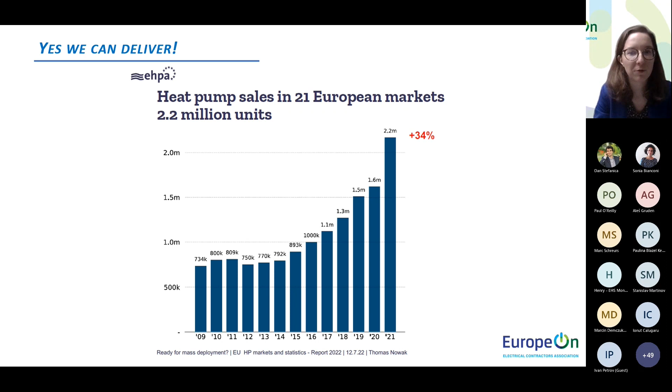One very last slide for me, please. It's about my expectations for today, because of course I know I remained quite policy oriented and a bit high level, without any presumptuous comments from myself. So I'm really eager to listen to the other presenters on the different projects that they are developing, which will be way more concrete. I just had a few expectations for today, so just maybe to start a bit, to engage with the next panelists.

First, the need to think upstream. As I said, it's not just about training better the existing workforce. We need to broaden the pool of workers. Upskilling has some internal barriers, for example the lack of time of people to upskill, maybe the lack of financial means. So how do we deal with that?

Reskilling, that I mentioned already. Of course, we cannot overlook the complementary or so-called secondary skills, such as soft skills, system integration, how do you work between different trades, cross-skilling. I also think that interoperability is key, so that the trainings that are provided are agnostic. It's no use being trained in only using one type of heat pump. We really need to have savvy installers.

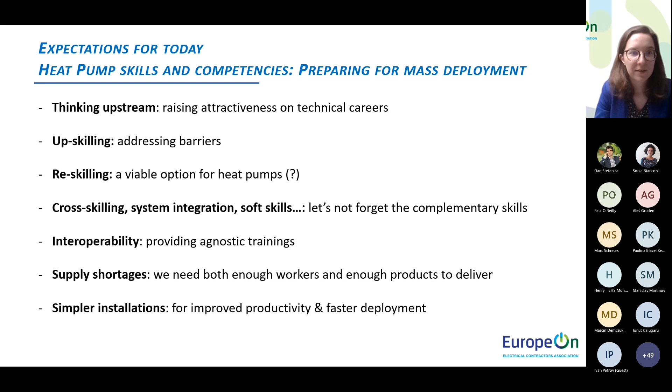Real food for thought there, I think, and a great way to start off this webinar. So with that, I'm going to move to the next slide and introduce our next speaker, Stephen Murphy, lecturer and researcher at the Technological University of the Shannon. He mainly lectures in community energy and renewable energy, and his research topics range from heat pumps, retrofit and renewable energy to waste management and circular economy.

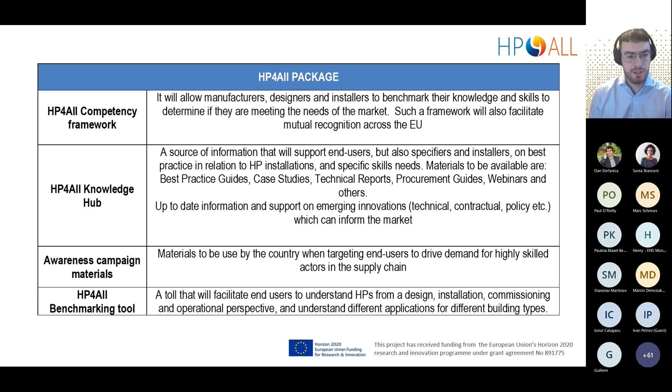So just a quick overview of what we're looking at for the HP for All project. I can happily say we've reached our targets. The impacts are based on training of installers, designers, specifiers, procurement officers, policymakers, and end users too.

We have primary energy savings from this project of 2 GWh per year, based on a calculation I won't get into now, plus renewable production of 1.95 GWh per year, and a reduction of 628 tons of carbon per year.

We've over 400 people trained—the latest figure is over 500, I think, maybe more, but around that. So yes, 400 people trained in 3 pilot regions. Each region has its own approach, because each has different stakeholders, a different market maturity, and in our case, 3 separate languages as well.

So you had to create the resources and materials based on your stakeholders and your market as well. This is coming into our replication plan. We're going to take this information that each market is different. One shoe doesn't fit all. Work has to be done to find what shoe to put on.

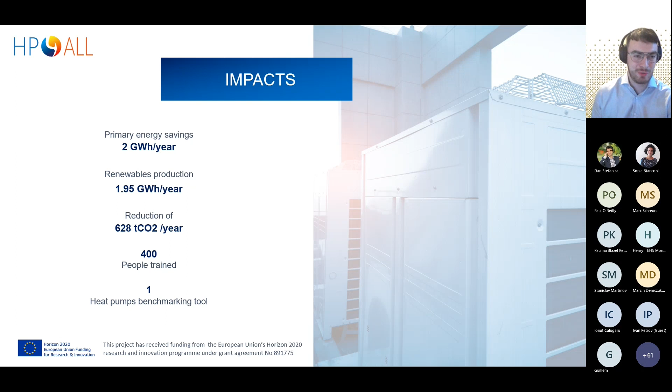Just an overview of the partners. We have EHPA, thank you for today. CTA, based in Andalusia. TUS, that's ourselves. IERC, based in Cork in Ireland. RINA, based in Italy. ESV, or Energy Spar, from Austria, and Sustainable Innovations from Spain.

So again, we've worked 30 months with each other, and I think we make a good team, and a very open team, a very hard-working team as well. So it's been a pleasure for the last 30 months, and here's hoping that we'll find more funding for this project going forward.

So today, to talk a bit more about heat pump skills and competencies. So just a bit of background first.

Another main output of this project, aside from the heat pump skills and competency framework, is the notion of mutual recognition of skills across Europe. This is, I would say, a touchy subject, and also a difficult subject to pinpoint. So we'll go through a bit of background first, and then we'll discuss how the HP for All project aims at addressing this.

Each EU member state sets out its own national system of education and training, for every single EU member state. This leads to its own professional qualifications, whether apprenticeships, guilds in some member states, or courses people can do. The EU has systems for recognizing these skills that enable professionals to make full use of their training so they can work in another country. Basically, a professional qualified person from one country is qualified to work in another country.

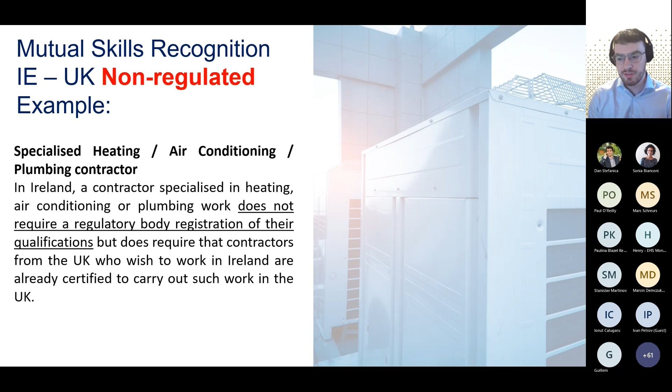For example, take this non-regulated tradesperson, a specialized heating, air conditioning, and plumbing contractor. In Ireland, if you're a specialized contractor in heating, air conditioning, or plumbing, you don't require your qualifications to be checked by a regulatory body, but you do require certification already in the United Kingdom. So if you're certified in England, you can kind of work in Ireland, but it's not really written anywhere. It's kind of just an industry tick, saying yeah, if you have it over there, that's fine.

Then you have a regulated body, like an air conditioning professional. I gave the example of the electrical contractor; now we're looking at an air conditioning professional. A qualified contractor based in another EU country or the UK is required to provide proof of qualifications in refrigeration, an apprenticeship in refrigeration, mainly a National Craft Certificate level around 6 in Ireland, around level 5 in the European framework. The contractor must also be F-gas compliant, and all this documentation has to be checked by a regulatory body for this person to work in Ireland. That's the main difference between the two.

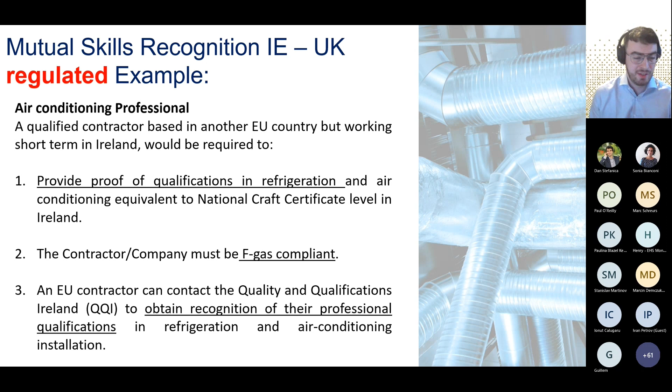So there are some trades with this unspoken law, that if you have one qualification you have the other. But with regulated trades, there's more nuance, or I wouldn't say nuance, more issues if it's not done correctly. For example, air conditioning with refrigerants: if refrigerants leak, that's a big problem especially for emissions. That's why it's regulated, to make sure it's a competent person doing the work and to reduce the likelihood of leaks.

So how does HP for All want to get into this minefield that is mutual recognition of skills? We can't directly force competency bodies, third level education, or apprenticeships to sign a waiver saying anyone who works in Ireland in heat pumps can work in Austria, for example. It's too complicated for that, there are too many actors involved. This is more of a start on the road to mutual recognition.

That's what I would say. So the agreement is signed by the HP for All project representative and another regional actor, you could say. The document is intended to commence a dialogue with the objective of mutual recognition of skills, so heat pump skills gained in one region can be recognized in another. I've put in there that it's not legally binding in any way. It's just a start on this road to mutual recognition. So again, there can be various ways to do it.

It doesn't have to be that your apprenticeship people talk to our apprenticeship people and come together and say the syllabus is pretty similar, we can sign off on that. It can also be things like an EU-wide academy. We'll have all options open, that's what I would say. There's no point focusing on one way of doing it. There has to be multiple ways of doing this.

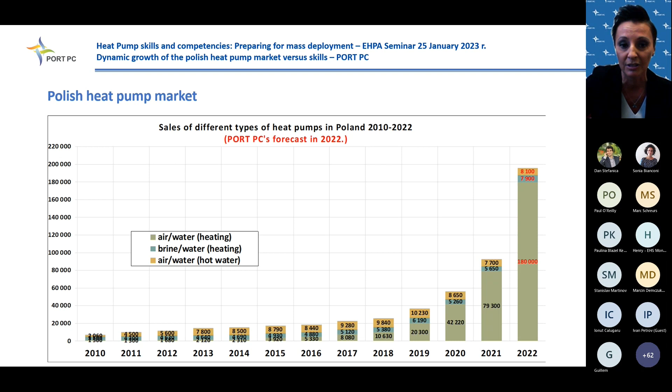This was the forecast, but if we look at last year's sales of heat pumps in Poland, we can see it was more than 90,000 units. And looking at the increase, it was also quite a big increase, more than 70% increase of the market.

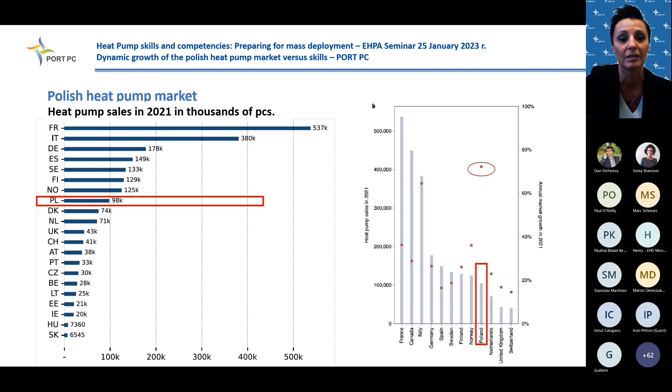So we can see that our country, right now after 2022, could be really high if we speak about statistics of heat pump sales in Europe.

This slide shows the increase of heat pump sales in countries in Europe after the first half of 2022. You can see how it looks in different countries, and of course Poland is here. It was estimated that sales increased about 136%.

But after the fourth quarter of 2022, we can observe that heat pump sales slowed down a bit. We estimate that sales increased not as much as after the first half of the year, but it will still be a quite big growth, because 122% is a big growth, hyper growth of the heat pump market. I think Poland could be number one if we speak about such a big increase.

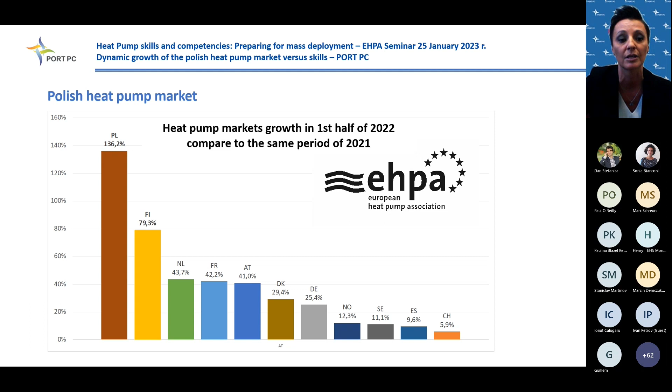Why did that happen in 2022? There are some main drivers of the hyper growth in Poland, but first I will choose the impact of the subsidies, the finance support in Poland right now, because as you can see, we have a few programs that are really attractive for the end user, for investors, especially if we speak about the residential market.

We have 3 main subsidy programs. The first one is retrofit tax relief. It is not a subsidy or grant, but it is a deduction of expenses for retrofitting investments from the amount of income tax calculating base. According to that, people can save some money for retrofit activities in their houses.

The main program that we have right now is Clean Air. Clean Air subsidy is for renovation, so you can exchange the old boiler for a new one that fulfills the eco-design requirements. But mainly people choose heat pumps, especially last year, and I will show you at the next slide how it looks in terms of the share of heat pumps in the subsidy applications.

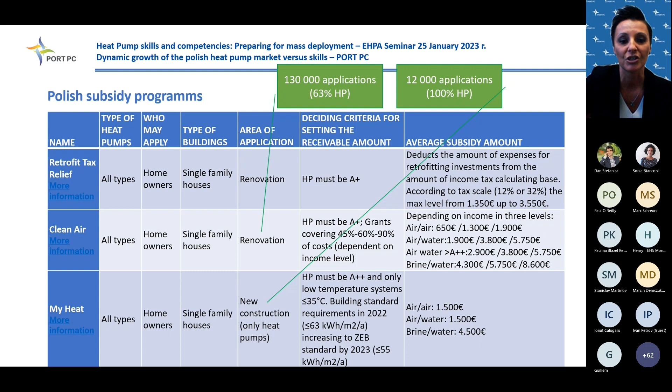So they have to meet the requirement of less than 55 kilowatt hours per square meter per year for their buildings. So we will just help to make the new buildings as energy saving as possible.

And if we speak about this statistics, here you have the graph that shows the share of heat pumps in applications for subsidy in the Clean Air Subsidy program, for the retrofit houses, for renovation.

You can see that something happened, as everybody knows what happened in February, and since February there is a big change in the share of heat pumps in applications. At the beginning, heat pumps had nearly 25%, 28% of the share in the applications for subsidy, and then it goes up to 60% right now. In the second half of the year, every month we've reached more than 60% share of heat pumps in the applications for subsidy.

If you look at the yellow line, this is for gas boilers. At the beginning, gas boilers were the main source chosen in this Clean Air program for renovation of houses, at 40% of the share in applications, and then it goes down to 20%, and it was kept there during the second half of the year.

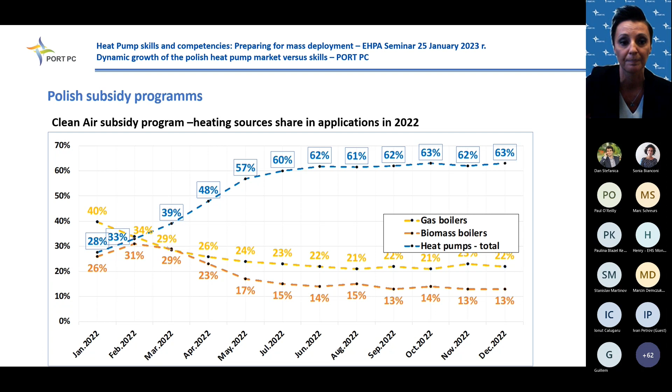To look at the situation in Poland, there is a graph that shows that in Poland in 2018, the main heating source was the coal boiler, then gas boiler, and also pellet boilers, and then at the top of the pyramid, with a small amount of units installed, it was heat pumps.

Then the situation changed in 2020. We can see that coal boilers decreased, gas boilers stayed at a high level, and pellet boilers also made quite a big increase. And of course heat pumps started to increase, and we can speak about this big boom for heat pumps in Poland since 2020.

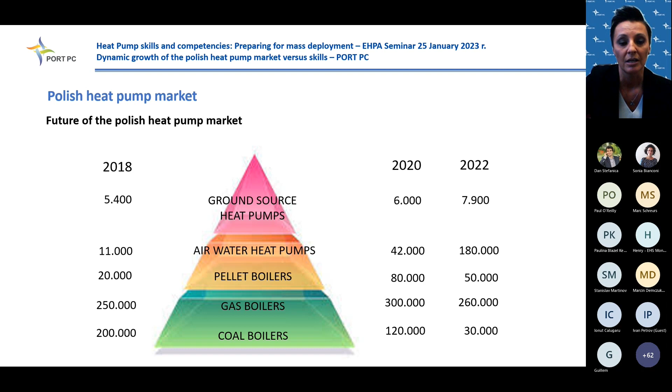And then in 2022, you can observe a quite big decrease in fossil fuel boiler installations, and also a little bit of decrease in pellet boilers. But you can see that heat pumps were pushed to the top level of the pyramid. So this is the situation right now, and I hope it will be stable for the next 10 years.

Yeah, this was the statistics for our market. And now I want to tell you about some good practices that we will have in Poland.

First of all, I want to tell you about the project of industry skills centers. It is a new project, implemented in September 2022 as a competition for institutes to establish such skills centers.

Right now, this competition is ending, and we will know how many and who will manage these skills centers. Also, as PORT PC, the Polish organization of heat pump technology development, we will also apply for financing of such a training center.

The plan for this year is at least 20 such training centers to be created by the end of 2023, and another 100 centers by the end of 2024. In this project, 120 fields were defined, and one center will be established in each region.

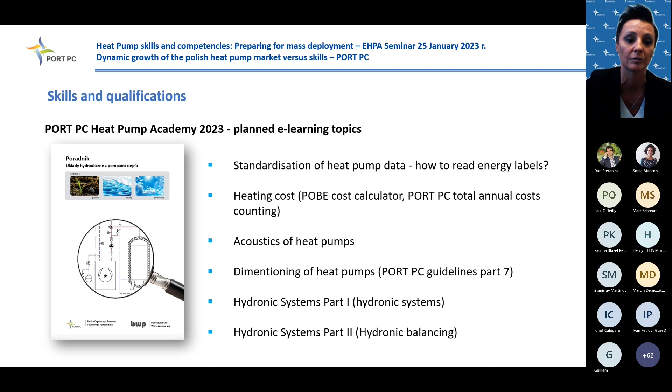Yeah, and if we speak about this standardization of data provided by the heat pump manufacturers, it's really important topic in Poland right now, because last year there are many new brands that appeared in Poland, and in some cases it's quite hard to find energy labels, to find product fiches for the heat pumps. So it's really important to push everybody to use the same data.

So for sure we will promote heat pump keymark and EHPA quality schemes in Poland. And we will push everybody to use product label and energy labels, and everybody should have access to the PDF files with these parameters.

So, for example, energy class, ETA-S, SCOP in the cold and average climate zones, sound power level and heating power, and things like that. All these parameters should be taken from the product label and energy label to speak the same voice and with the same standards.

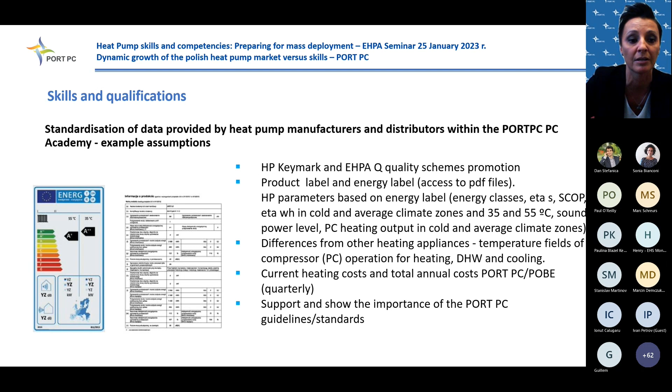So this was my presentation. This is the last slide.

So thank you very much one more time for the invitation, and I was happy that I could show you how it was in Poland, because right now everybody is asking what is going on, why there is quite a big boom in Poland in heat pumps, and everybody is wondering if next year we will have the same big increase in our market. So thank you very much.

Thank you so much, Gosia. Very interesting indeed to have that insight into what's happening in Poland and to get some context on that. So thank you.

So now we pass over to Rolf Iver Mytting Hagemann, who's the Secretary General of the Norwegian Heat Pump Association, where he's been since 2014. There he's responsible for policy, framework conditions, consumer information and training of installers, contractors and consultants. He's active in several of EHPA's committees and is Norway's delegate in the IEA Technology Collaboration Programme on heat pumping technologies. Thank you very much, Sarah.

I will use approximately 50 slides. Most of them are just pictures, so I will be ready within 20 minutes. So in short, I will just start with some background.

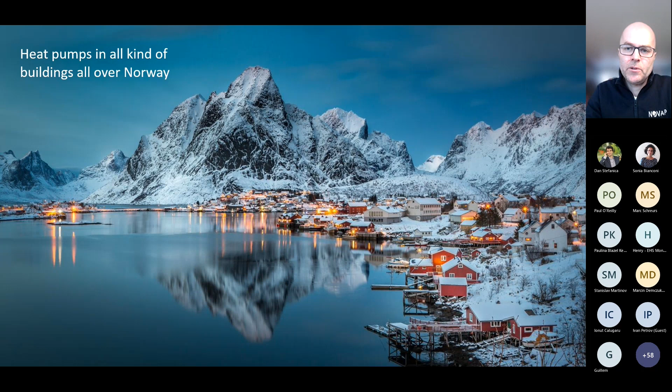So I'm going to say a little bit about some success factors for heat pumps in Norway. There are lots of different drivers for using heat pumps in Norway, prices and ban of fossil fuels, etc. But we have, together with the other Nordic countries, been quite demanding towards the manufacturers from both Europe and Asia, so we have high quality heat pumps for cold climate dominating our market.

Many of these heat pumps are more expensive than what you find in other European countries because they have to work at really cold conditions. We have a large network of skilled installers throughout the country, especially when it comes to air-to-air, and I will show you the statistics in a few minutes.

The challenges we have are especially the air-to-water and brine-to-water heat pumps. They are costly, as in the rest of Europe, and many end consumers, both in private households and commercial buildings, regard them as expensive, even if they are profitable. They are regarded as expensive because they look at the investment cost and not necessarily the cost of paying for energy.

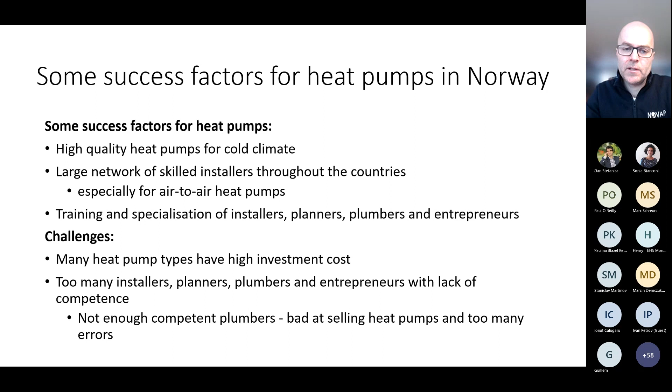Of course, most heat pumps in Norway work well. If not, we wouldn't have the numbers we have. But still, there are too many complaints and too many installations with errors, and we can't have that in the future. A little explanation about the heating system in Norway.

I'm not going to go into detail, but what you see in green is use of electricity. In industrial processes, of course, we still have a lot of fossil oil, coal, and gas for some industrial processes and heating, but electricity is common in many industrial processes, and heat pumps are getting more and more common in several of them. When it comes to heating in all kinds of buildings, electricity is the main heating source, together with electric heat pumps.

And you will see the same in Sweden and Finland too. Of course, there you will see more district heating than in Norway. We also have district heating, but not as much as in those countries and in Denmark. But we differ a lot from the rest of Europe since we have a much larger share of renewable energy, or renewable electricity. Like 98% of our electricity is renewable. So electric heating is much more common in Norway compared to the rest of Europe, where gas or district heating from fossil sources are dominating for the moment.

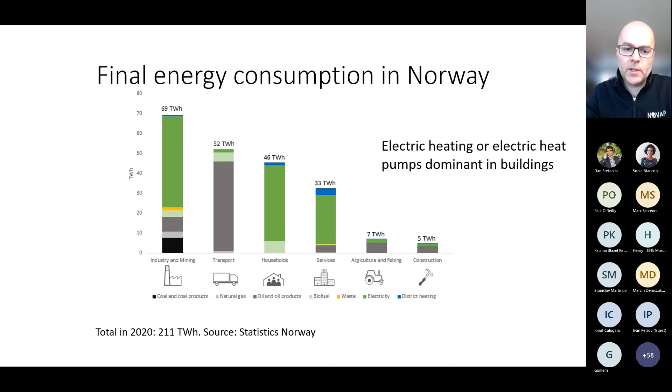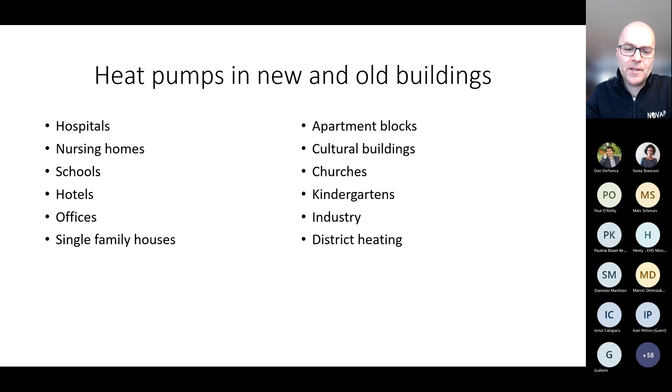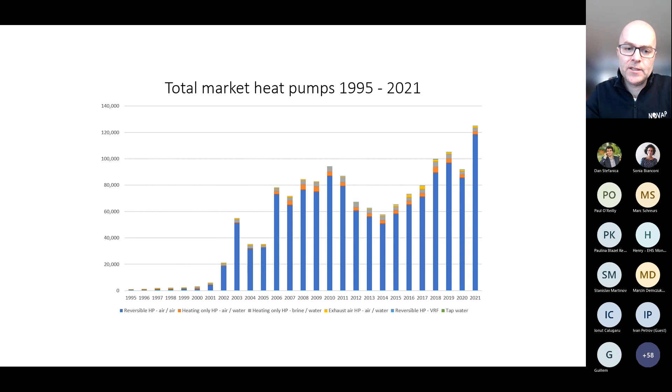So here you see the figures on the amount of heat pumps sold until 2021. You see that air-to-air heat pumps are dominating. Of course, we also have air-to-water and brine-to-water, but the share is much smaller than, for instance, in Sweden and Finland. They also have a lot of air-to-air heat pumps, but they have much more air-to-water and brine-to-water heat pumps as well.

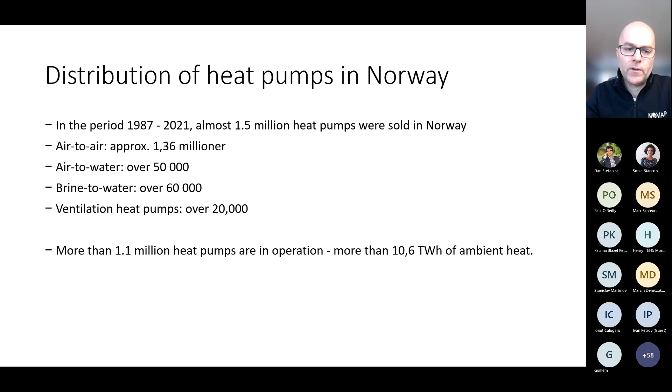So just to show some pictures of air-to-air heat pumps, for many of our European colleagues, it seems strange that we have so much air-to-air heat pumps in a cold country as Norway, but the air-to-air heat pumps that dominate in Norway are high-quality heat pumps that work down to -25, and the COP is quite good, actually down to -15 or -20.

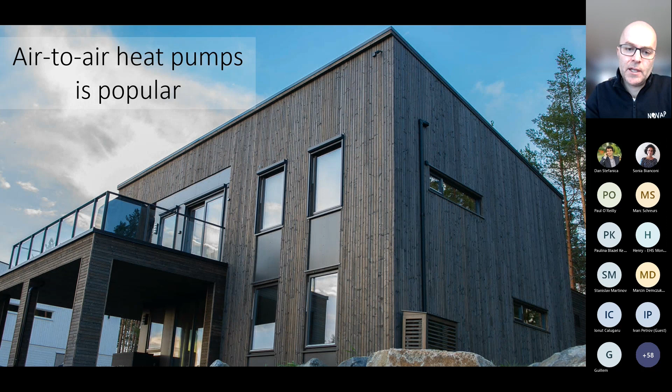But of course, in an old, not well-insulated house, air-to-air heat pumps cannot be the only heating source. So very often, air-to-air heat pump is an important heating source, but we have direct electric heating or use of wood stoves as additional heating. But in small energy efficient houses, quite often an air-to-air heat pump is the main heating source throughout the whole year, and it's only at the coldest days that you need additional heating. But that depends on the size of the house and how well insulated it is.

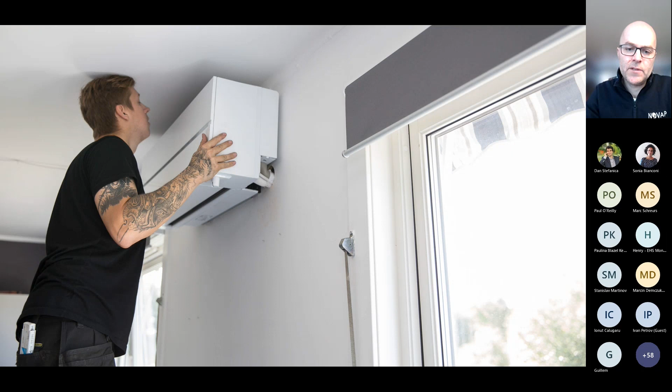So here you see a common air-to-air heat pump. More and more people use them also for cooling during summer, but it's mainly bought as a heating device. In many other European countries, they are mainly used as air conditioners, but in Norway, the driving market is for heating. So you have wall hanging units, and you have floor mounted heat pumps.

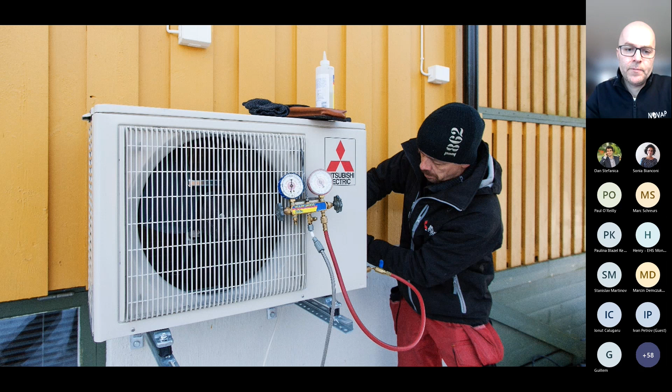This is a common outdoor unit. More and more mountain cabins have them. So of course they have to work where there's lots of snow and where it's cold.

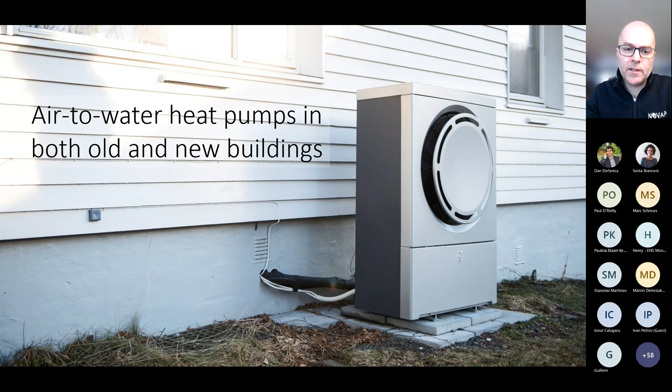And of course we also have air-to-water heat pumps in both new and old buildings. Ground source heat pumps are normally more robust in old buildings with high temperature heating systems. We have drillers all over Norway for all kinds of buildings.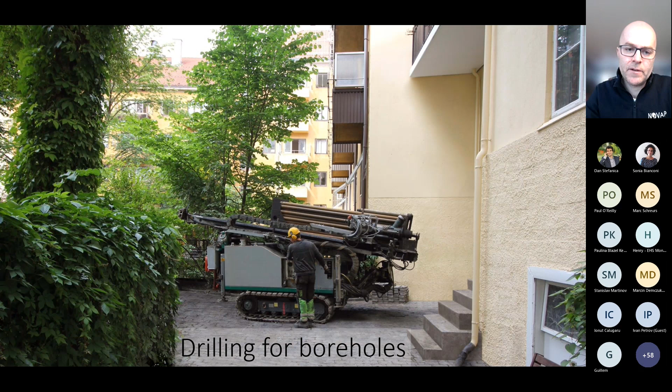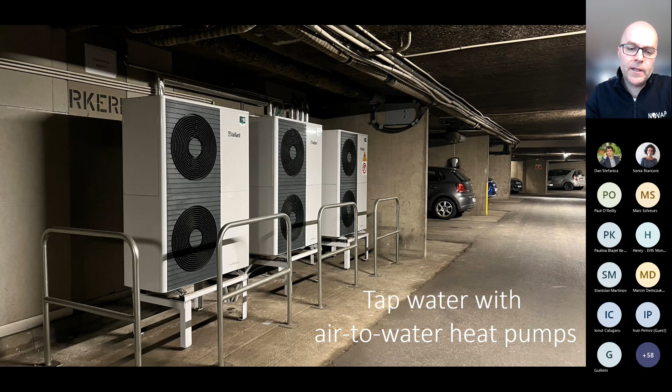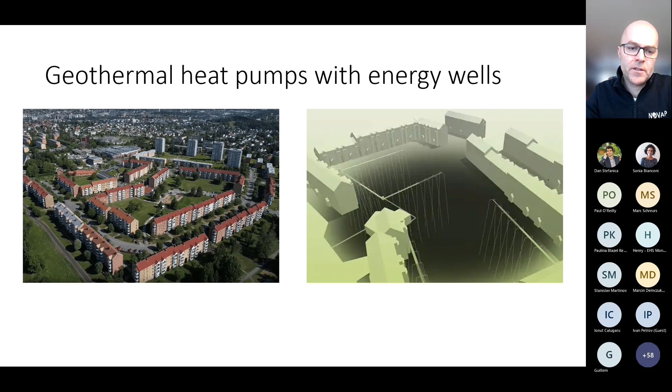And this is one of the largest multi-family house areas in Norway where they have one common energy well for all the buildings, but we have lots of energy wells all over Norway. And this is an ammonia heat pump from a new energy efficient big building.

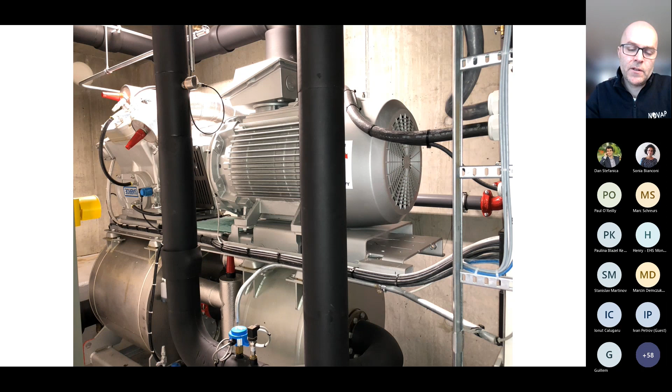So the reason why I show all these buildings is to show you that the heat pump market is quite diverse. So you have some installers that only work with small air-to-air heat pumps, and others that are skilled and work with more complex heat pumps, and some are also specialized only in natural refrigerants. And also you have the large industrial heat pumps and large heat pumps that we have in district heating.

So who is doing what? Because quite often we talk only about the installers, but you have engineers that design the heating systems in larger buildings, and you have heat pump engineers that are specialized on the heat pump itself, but they might not be specialized on how to design a good hydronic or heating system. You have lots of engineers and plumbers that are designing heating systems that don't necessarily know the conditions that are needed for a good heat pump system.

You have lots, unfortunately, too many plumbers that don't have sufficient training in heating systems and heat pumps, even if they are doing installations. Quite often they just get support over the phone from some of the importers, but too many of them don't have the necessary skills to do good installations. And you have refrigeration and heat pump technicians that normally specialize on larger heat pumps, refrigeration systems, freezers, and many of them don't work with heat pumps for households.

So the market for air-to-air heat pumps is dominated by installers that are electricians or that have other kinds of backgrounds who have been to our or other members' courses to learn how to install heat pumps. So those that are specialized in heat pumps, that are educated in heat pumps, they normally work with larger systems. Of course, some of them also install smaller heat pumps, but the market for smaller heat pumps is normally dominated by either plumbers or electricians and others that have just done training courses. They are not necessarily educated.

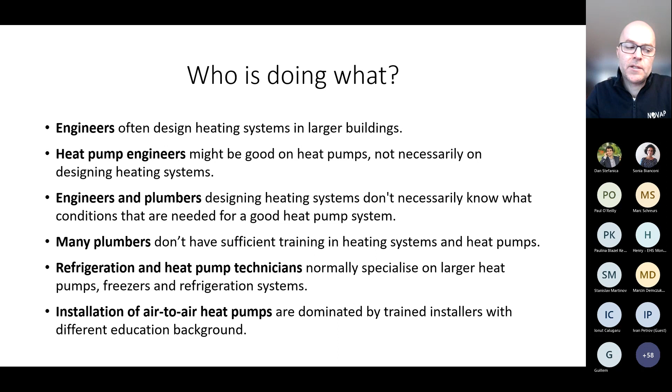So what do we have in public education in Norway? We have a vocational education system where you have the first 2 years - we have different kinds of vocational education for electricians and plumbers and different kinds of professions, but this is for the refrigeration, cold and heat pump technicians. So the first 2 years is a common education for working with refrigeration, heat pumps, and ventilation, and then they get more specialized in the 3rd and 4th years.

Then they become a trainee out in a company. It's also possible to have fewer years, only 1 year at school, and then do the rest of the education at a company with guidance. It's also actually possible to do all the education at the company, but this is the most normal way to educate themselves. And what they do is specialize in heat pump and refrigeration technology.

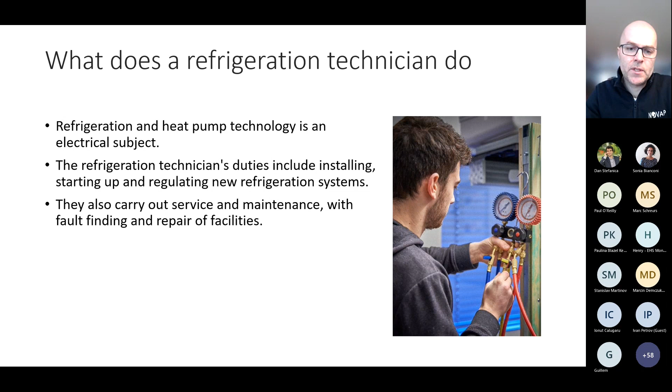So they are trained in installing, starting up, regulating and doing maintenance on these heat pumps and refrigeration systems. And also we have the plumbers, who have the same education system but a half a year longer apprenticeship. So they either have a 2-year education, 1-year education, or a 4.5 year traineeship.

But what is a challenge is that the education system for plumbers for the moment is not good enough for heat pumps and hydronic systems. So they are depending on doing courses and being trained after the education.

Also, after you have become a plumber or a heat pump technician, you can go to a technical college for 2 more years, and you need some extra education to go further for an engineer degree.

Or there are also lots of students with all kinds of backgrounds that go directly to a bachelor degree or master degree in heat pump engineering. So what do we do?

I will show this shortly. Since 2000, we have had different kinds of training systems. We started with a general theoretical education system.

Jeg fant dette på nettet om teoretikal. Sorry, it's Siri that's talking to me.

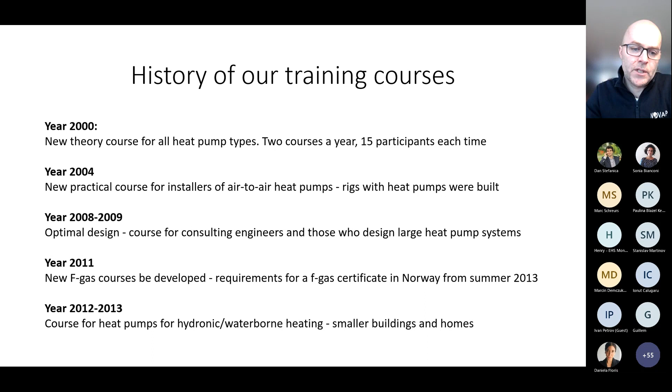Then we introduced the F-gas regulations first in 2013, so we introduced our first courses in 2011. And then we have had courses for hydronic systems from 2012. So we are the largest training provider for heat pumps in Norway.

So lots of people go through our website where they can find our courses. I will show some of them. For the moment, we have 10 different courses and 4 new being established.

So the most popular course is the F-gas regulation course, because if you're working with several kinds of heat pumps, you need that kind of certificate, and we are kind of strict. So you are not allowed to do our F-gas training or take the exam without having the proper formal education from before.

If not, you have to do our basic air-to-air heat pump installation course. And then we have lots of other courses too, but I will just show a few of them.

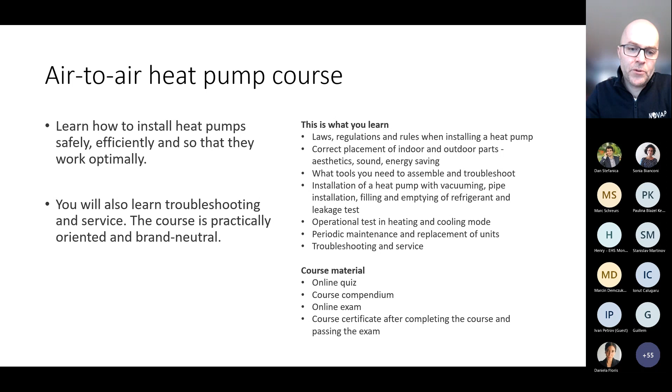So we have an air-to-air heat pump course where you actually learn what you need to do when you plan, install and maintain an air-to-air heat pump. It shows here what you learn and what kind of material you get, and you can go through this presentation later if you want to look at the slides.

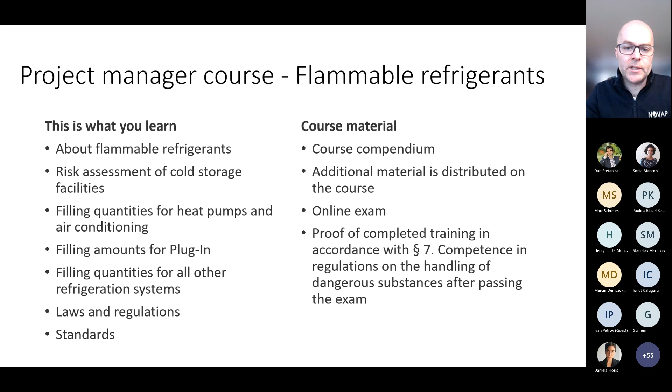We also have courses for flammable refrigerants, because we see that the use of flammable refrigerants is growing rapidly in Norway. We are doing a lot of cooperation with others.

So several actors are using our training material, several actors are doing marketing on training courses. They tell installers to go to our training courses or do our training with some of the actors we cooperate with. Last year, together with cooperating actors, we trained 1,100 persons on different kinds of courses.

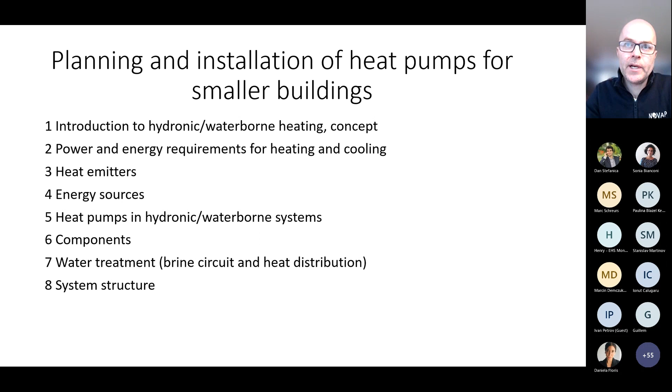So in short, to end up, we are working on new courses also, a new course on heat pumps for hydronic systems, and the training that we have. I will show you just shortly.

We are also working on making guidelines for different kinds of buildings, and for some years in the former education committee, HPA had a cooperation with other countries to try to find out what kind of training courses exist, how many days are the courses, and what topics are covered.

I will not use more time now, but there are challenges: there should be more mandatory certification schemes in Europe. We don't have that. So we are discussing now how strict our training courses and exams should be, and how we can attract more people to take our courses.

We also have big consumer websites, and we try to stress all the time that there is too much focus only on the heat pump itself, but it's at least as important that you have a good installation. Then you need skilled installers. Okay, thank you, I will end there.

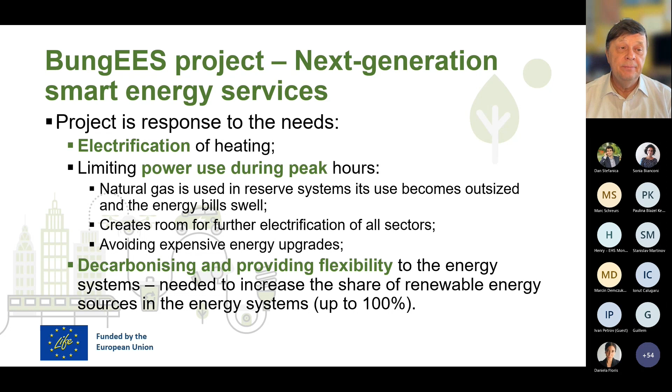So why mentioning our project? It is because heat pumps are only part of the story, not just a promotion for the project we are doing. We need to keep in mind that we need to install smart energy systems that integrate energy efficiency with heat pumps, renewable energy sources mainly solar and wind, energy storage, hybrid systems, electric vehicle charging, and smart orchestration of all these energy assets in buildings using smart energy services based on demand response to save energy, increase energy performance, harvest flexibility from buildings, provide flexibility to energy systems, and replace carbon-based energies and fuels.

You can do it at a single building level, as shown on the picture, or at neighborhood or district level, exploiting synergies including effects of integrating different sectors. And here I mean the sectors of buildings, transport, and industry, especially SMEs.

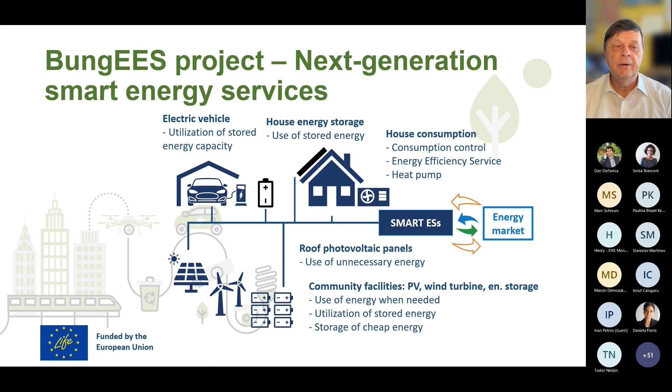In our consortium, operators coming from Portugal, Spain, France, Italy, Germany, Czech Republic, and Slovak Republic are providing energy services to over 10 million households in 7 countries. This includes also countries outside of our consortium, like Slovenia and Greece.

So what we are trying to do in order to develop their business and facilitate mass rollout, not only of heat pumps but of smart energy systems, is focus on developing new business models that underpin a one-stop shop approach in this sector.

I think that is already a known term, so I will not go into details. We are well on the way to commercialize the first service package within the project, which will have potential for mass rollout on the mentioned markets.

We are also innovating the services by integrating non-energy services, for example by monetizing non-energy benefits, because it has been proven that non-energy benefits are an important motivation factor for consumers to undertake energy renovation of their dwellings. Therefore, in order to facilitate the growth that is needed, we believe non-energy services need to be included in our service packages.